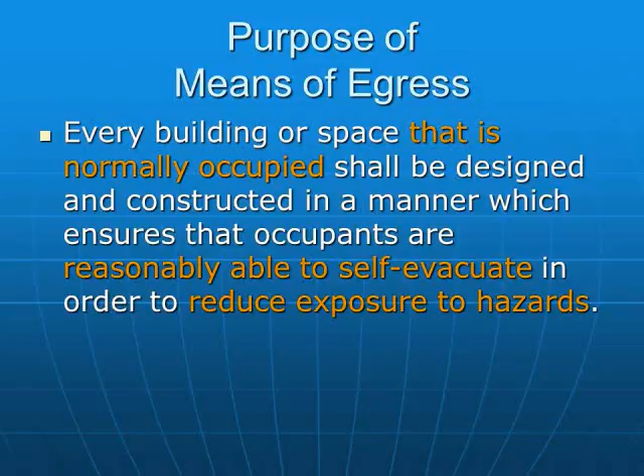Also note that the objective is not to make a building absolutely perfect and risk-free. The means of egress system provides occupants the opportunity to be reasonably able to self-evacuate in a manner that will reduce their exposure to a developing hazard within the building.

The means of egress for a building is composed of a system that consists of three components. Those components are the exit access, exit, and exit discharge. While these egress components may often seem very similar, each component serves a different purpose and protects occupants in a different manner.

Understanding the distinct purpose of each component is critical to ensuring a safe building because occupants may need a different mode of protection depending on where they are. Protection of a person located in a large open room may utilize different design strategies than a person located inside a fire resistance rated stair shaft or located outside of a building on an exterior exit balcony.

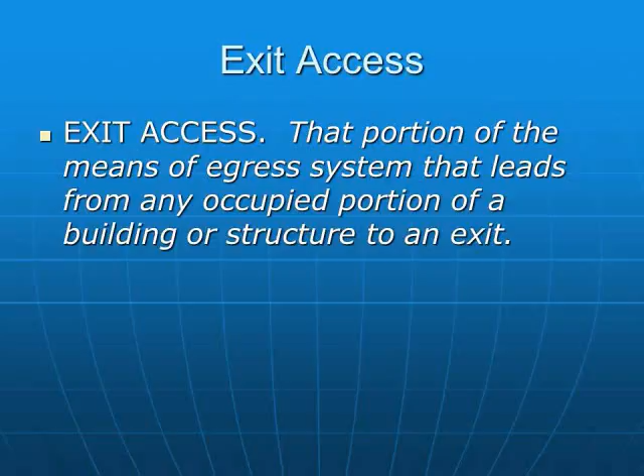So let's take a quick look at the purpose of these three components, starting with exit access. Exit access is defined as that portion of the means of egress system that leads from any occupied portion of a building or structure to an exit.

Next, the exit is that portion of a means of egress system between the exit access and the exit discharge or the public way. Exit components include exterior exit doors at the level of exit discharge, interior exit stairways, interior exit ramps, exit passageways, exterior exit stairways, and exterior exit ramps and horizontal exits.

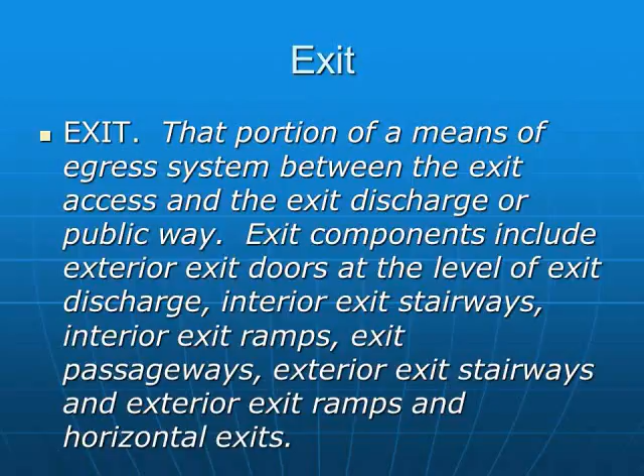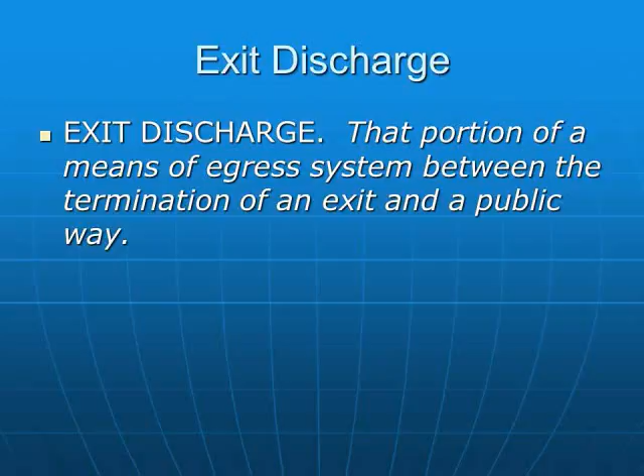Finally, exit discharge is defined as that portion of a means of egress system between the termination of an exit and a public way.

Graphically, we can see how the three components work together by considering the man on the fourth floor of this building. Features designed and constructed into the building will lead him to an exit. Those features comprise the exit access.

Once the woman enters the interior exit stairway enclosure, the exit component will provide her with a safe, protected, and continuous path extending from the exit access all the way to the exit discharge or the public way.

Finally, the woman at the bottom has reached the termination of the interior exit stair and advances further away from the building until she reaches the public way. This final portion is the exit discharge.

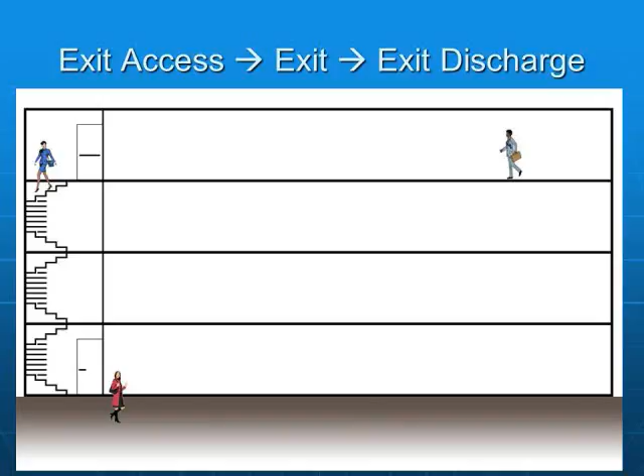So now that we've seen how the three-part means of egress system works, let's take a look at some common elements of an egress system. Each of the three components may be comprised of one or more individual elements. Typical elements of an egress system include such things as doors, exit access ramps, interior exit stairs, exterior exit balconies, exit courts, corridors, exit passageways, horizontal exits, areas of refuge, and many more.

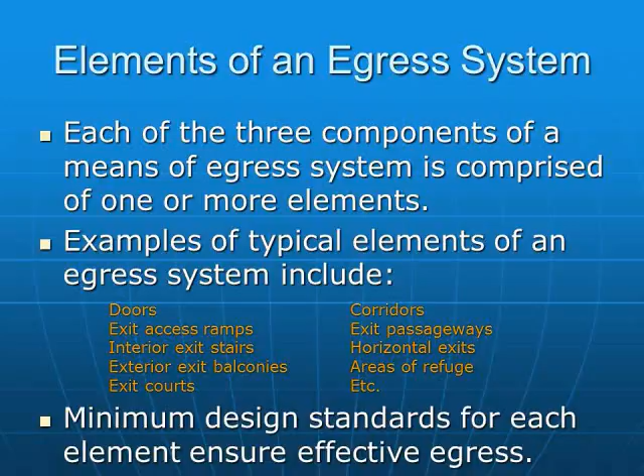The minimum design standards for each element within the egress system are different, and collectively they work together to ensure an effective egress system. So it sounds simple enough, right? Well, consider this. Do all egress systems include each of the three components? Do all egress systems include an exit access, an exit, and an exit discharge?

When designing a building or performing a plan check prior to permit issuance, or when conducting a building inspection during construction, how do you know which part of a means of egress system you're in? Who decides which part of the means of egress system you're in? How do you determine what level of protection is required?

These are all important considerations because a designer should not be expected to integrate exit features into a portion of a building that serves only as an exit access component. Similarly, once building occupants reach the exit discharge, most protection features associated with the exit components are no longer mandatory. As long as code limitations for each individual component are not exceeded, the designer is entitled to determine which egress component is used within the building. Let's take a look at how egress systems work.

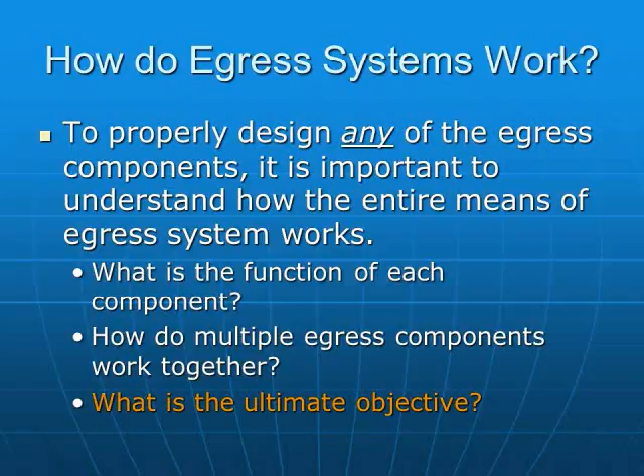To properly design any of the egress components, it's important to understand how the entire means of egress system works together. Ask yourself, what is the function of each component? How do multiple egress components work together? Remember, we're considering not just an exit, but an entire means of egress system. Consider, what is the ultimate objective? Well, at its most basic, the ultimate objective of every egress system is to safely facilitate the effective and orderly self-evacuation of all building occupants under conditions which are reasonably likely to occur at some point during the building's anticipated life cycle.

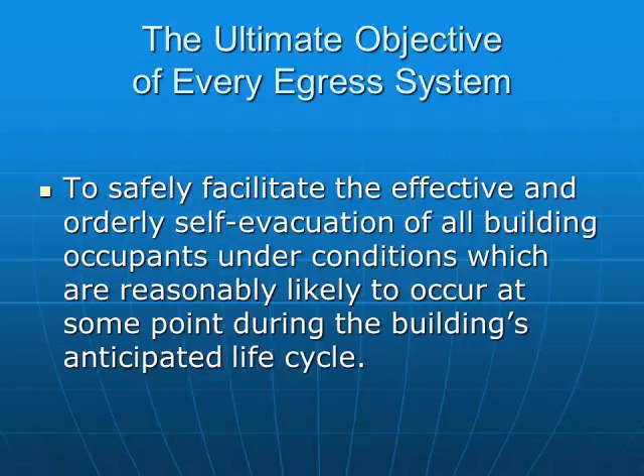So before we get into some of the technical aspects of means of egress, let's take one final look at how multiple egress components work together. First, before a building's means of egress even comes into play, occupants are informed that there is a need to evacuate the building. This may result from the actuation of a building's alarm system, or due to shared information among other building occupants, or the individual may observe a developing hazard with their own eyes. Here's where the means of egress system starts to function.

First, it enables occupants to find an exit in a safe, effective, and orderly manner. Second, it protects the occupants if they will remain inside the building for an extended period of time while they progress toward safety. Third, once out of the building, it facilitates dispersal of all occupants away from the building so they do not hinder the ability of others behind them from also leaving the building. The exit access is the portion which enables occupants to quickly and effectively find an exit. The exit protects the occupants if they will remain inside the building for an excessive period of time before they get out. The exit discharge facilitates dispersal of occupants away from the building to avoid congestion.

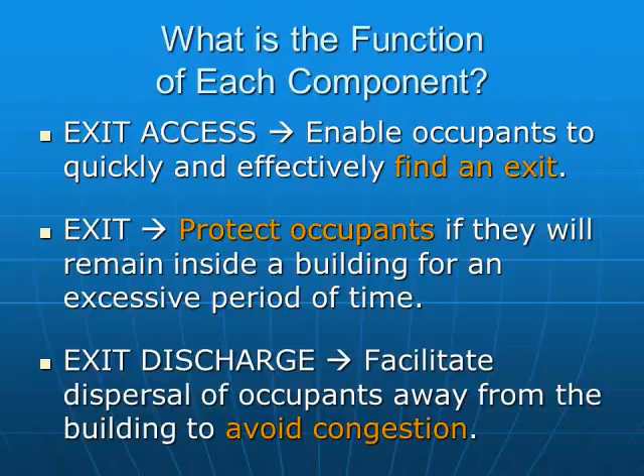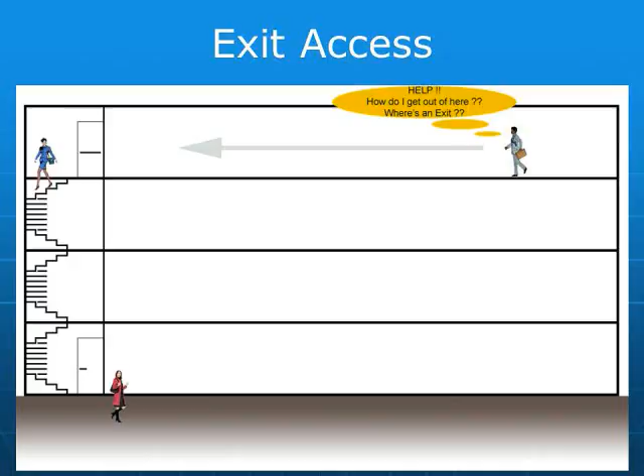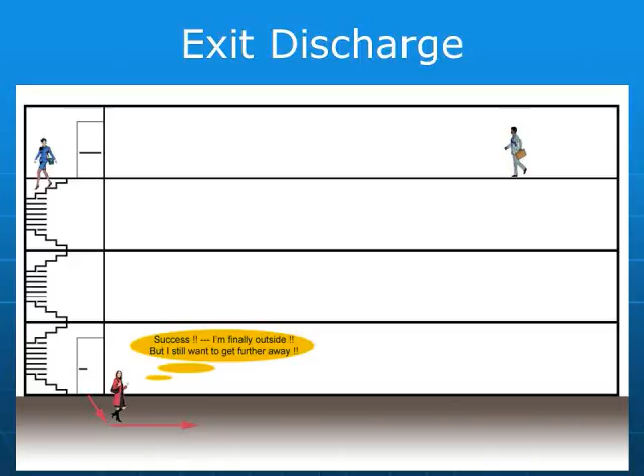So as we can see, occupants commence their evacuation within the exit access as they maneuver themselves through occupied building spaces in search of an exit. Once they find an exit, a significant level of protection is provided because it may take them a while before they reach the end of the exit and emerge from the building. Once outside of the building, exit discharge features provide further safety by facilitating dispersal of people toward a safe location, such as a public way.

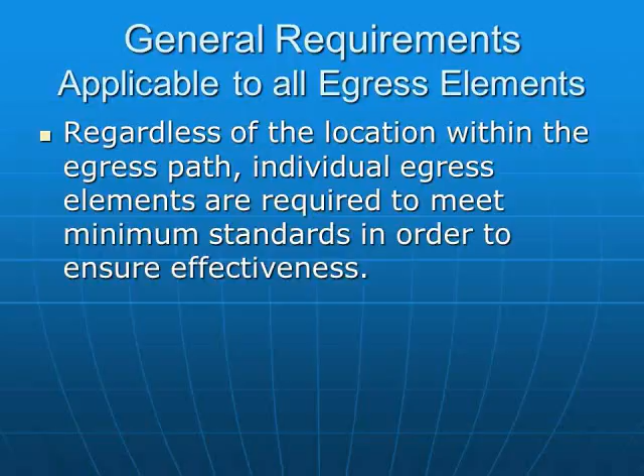So now let's take a look at some general requirements that apply to all egress elements. The entire means of egress system is only as strong as its weakest link. Regardless of the location within the egress path, individual elements are all required to meet minimum standards, and in this way, they fit together to ensure an effective system. These minimum standards address issues such as clear space necessary to provide sufficient height and width along the egress path, obstructions and protrusions which may extend into the egress path, doors and door operations along the entire length of the egress path,

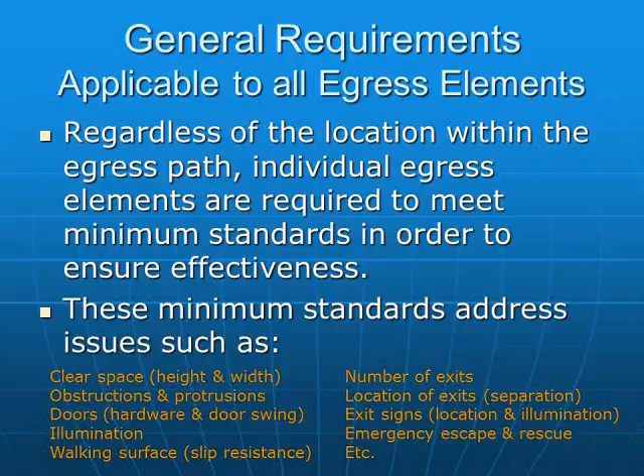illumination to ensure that occupants can see where they need to go, walking surface characteristics to ensure that people don't slip, trip, or fall while trying to find their way to safety, number and location of exits to ensure a safe and effective distribution that will accommodate all of the occupants within a building or space, exit signs to effectively direct occupants to safety rather than require them to search during an emergency situation, emergency escape and rescue openings from sleeping rooms to ensure that people aren't trapped if a hazard develops while they are asleep.

Let's start with ceiling height and obstructions. To ensure that occupants can safely and rapidly progress through the means of egress system without unexpectedly hitting their heads or other parts of their bodies, the means of egress system shall have a minimum ceiling height of not less than 7 feet 6 inches.

There are a few exceptions which allow for some reasonable deviations. Portions of sloped ceilings and ceilings within residential occupancies are allowed to extend lower than 7 feet 6 inches in accordance with Section 1208.2. These are generally areas along the perimeter of rooms, which often accommodate furniture and are not likely to be part of the normal circulation path.

Projections such as ceiling light fixtures, architectural embellishments, and structural components are allowed to extend down to 6 feet 8 inches, provided such projections do not exceed 50% of the width of the space.

Within parking garages and mezzanines, the ceiling height may be reduced to 7 feet 0 inches. Finally, at stairs, ramps, and doorways, the minimum clear height may be reduced to 6 feet 8 inches, with further allowance that door closers and door stops may extend an additional 2 inches to 78 inches above the walking surface.

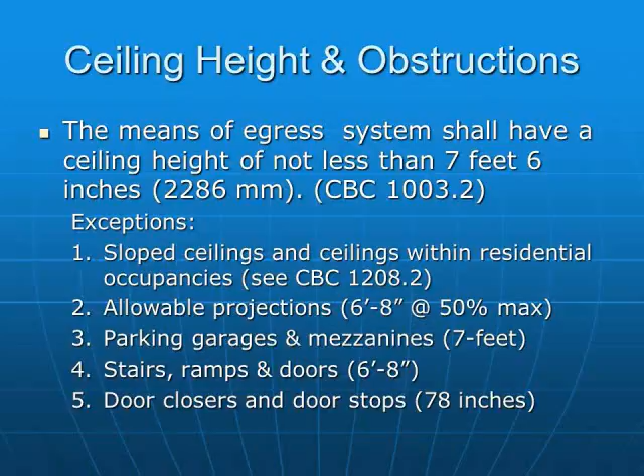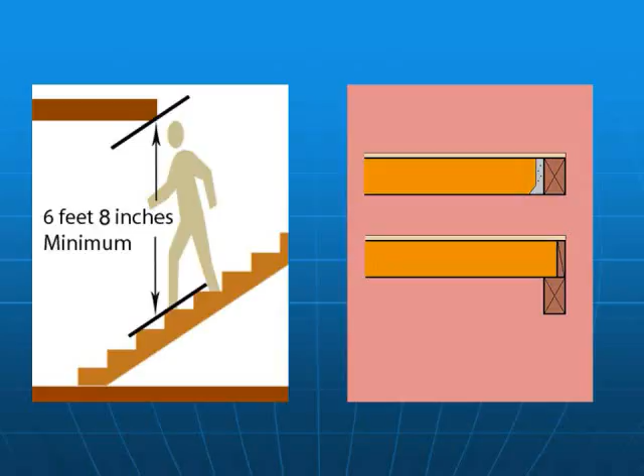As seen on the right, the distance between supporting floor joists by bearing directly on top of a beam versus framing the joist flush by using joist hangers can make a big difference.

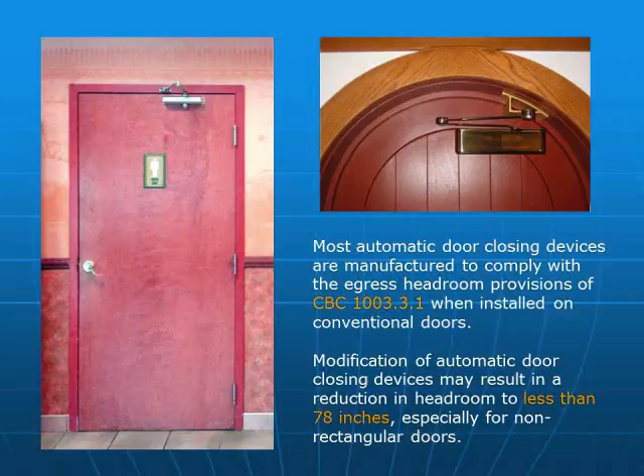While the underside of door stops and door closer devices are allowed to extend down to 78 inches, modifications to standard hardware as shown on the right may cause portions of the door closer to project even lower than 78 inches. The minimum clear width of most means of egress elements is determined on the basis of occupant load.

Additionally, since people naturally require more time to move vertically downstairs compared to the time necessary to move horizontally across a flat floor, the code establishes a slightly wider standard for stairways compared to all other egress components. Essentially, the larger the number of occupants that must fit through an egress component, the wider it must be to prevent a bottleneck.

For stairways, the minimum width in inches is determined by multiplying the occupant load served by a factor of 0.3. Hence, an upper floor of a building with an occupant load of 800 people would require a minimum width of 800 times 0.3 equals 240 inches of total egress stair width.

For stairways serving other than Group H and I2 occupancies, the minimum width factor is reduced to 0.2 inches per occupant when the building is equipped with both an automatic sprinkler system and an emergency voice alarm communication system.

For Group H1, H2, H3, and H4 occupancies, the minimum width factor for stairways is 0.7 inches per occupant, in recognition that the extra width may enable more effective egress from hazardous occupancies.

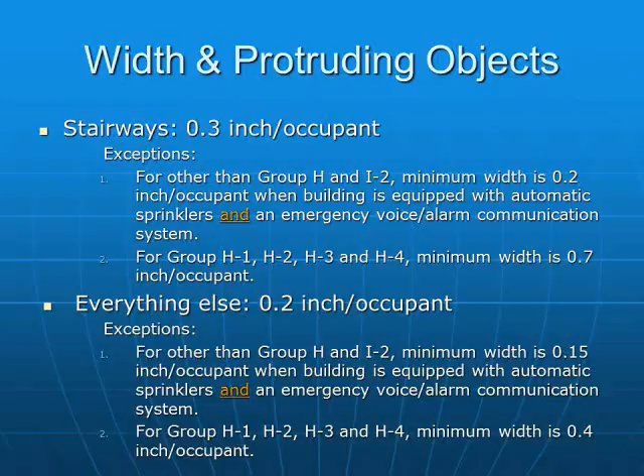For Group H1, H2, H3, and H4 occupancies, the minimum width factor is 0.4 inches per occupant, in recognition that the extra width may enable more effective egress from hazardous occupancies.

To reduce the likelihood that objects protruding from walls will interfere with effective circulation, horizontal projections are limited to a maximum of 4 inches when located between 27 inches above the walking surface to 80 inches above the walking surface.

The purpose of limiting horizontal projections is primarily to assist visually impaired individuals and to prevent obstructions from slowing movement within the circulation path of an emergency.

For consistency with accessibility standards, handrails are permitted to protrude 4.5 inches from a wall, and special provisions are also included in the code for Group I2 occupancies to allow for gurney movement and alcohol-based hand sanitizer dispensers.

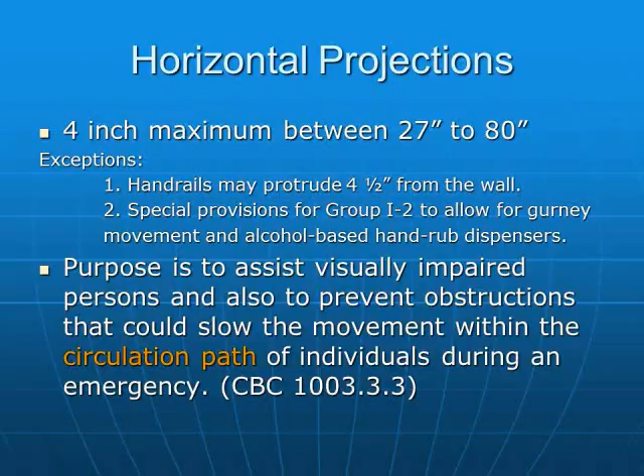Proper walking surfaces are another important aspect of egress systems. Unfortunately, the consequences when even a single person trips, slips, or falls, while others behind them are also attempting to flee from a hazard, can be severe. So, what's required?

Section 1003.4 establishes that walking surfaces of the means of egress shall have: 1. A slip-resistant surface, and 2. Be securely attached. But even with a properly secured, slip-resistant finish, people can still stumble if elevation changes are not properly addressed. To avoid problems, elevation changes less than 12 inches in height must be sloped, and slopes greater than 20 to 1 shall be by a ramp.

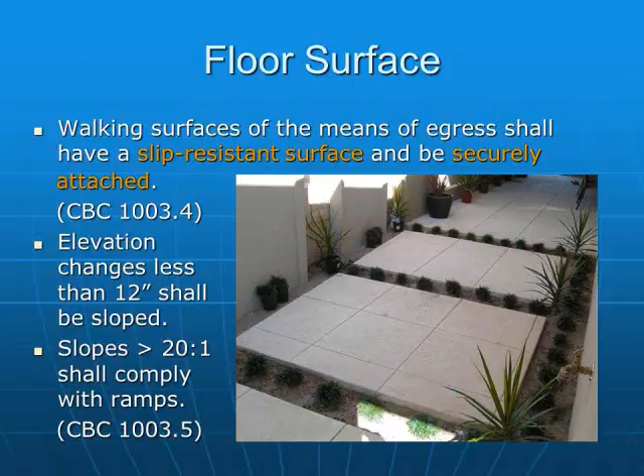Speaking of marginally illuminated environments, how much illumination is required? It turns out that the human eye can discern quite a bit of detail with just a little light. Accordingly, normal illumination within the egress path is sufficient as long as the intensity is not less than 1 foot candle, measured at all points along the walking surface at all times in which the space served is occupied.

Under normal conditions, illumination power shall be provided by the premises electrical power system, which ensures constant illumination at a consistent intensity. But in the event of a power failure, certain areas within the means of egress are required to have an emergency power supply which will provide all of the following.

Emergency generators or batteries shall last at least 90 minutes. Emergency lighting shall supply an average intensity of at least 1 foot candle throughout the means of egress, with a minimum of 0.1 foot candle intensity at all points along the walking surface.

At the end of 90-minute duration, emergency power shall still be sufficient to provide an average intensity of 0.6 foot candle with a minimum of 0.06 foot candles at all points. The maximum to minimum illumination ratio of 40 to 1 remains in the code, which is intended to prevent emergency lighting fixtures from being installed in a manner that results in areas that are exceedingly bright or dim.

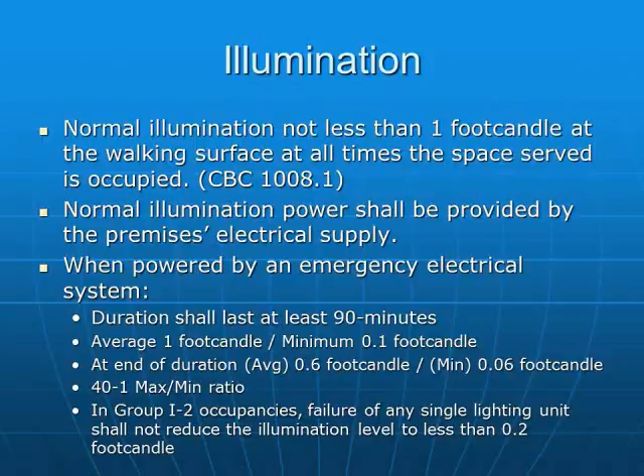The reason that emergency lighting is subject to a maximum-minimum intensity ratio is that most emergency lighting is accomplished through dedicated lighting fixtures instead of general lighting equipment.

High-intensity emergency lighting is very popular because it can broadcast light over a very broad area while using fewer devices. Unfortunately, if they are spaced too far apart, the walking surface immediately below the units can be extremely bright, while the intensity drops off further away. Just as our eyes need to adjust when you walk into a dim movie theater, vision can be impaired if the egress path passes through very bright spots to dim locations.

Often, the only way to evaluate this during a building inspection is to cut building power and measure the lighting intensity during nighttime hours.

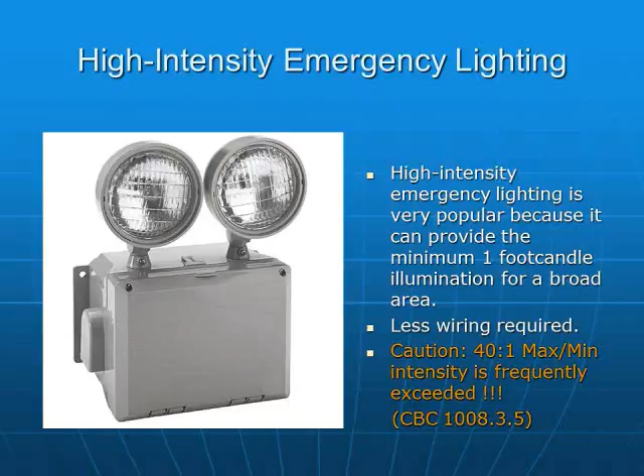So where does the egress illumination require emergency power? Emergency illumination power is required in rooms and spaces that require 2 or more means of egress, at aisles, corridors, and exit stairways and ramps.

It's also required in buildings that require 2 or more means of egress at interior and exterior stairs, ramps, and exit passageways, vestibules, and areas on the level of exit discharge used for exit discharge, and at all exterior landings for exit doors that lead directly to the exit discharge.

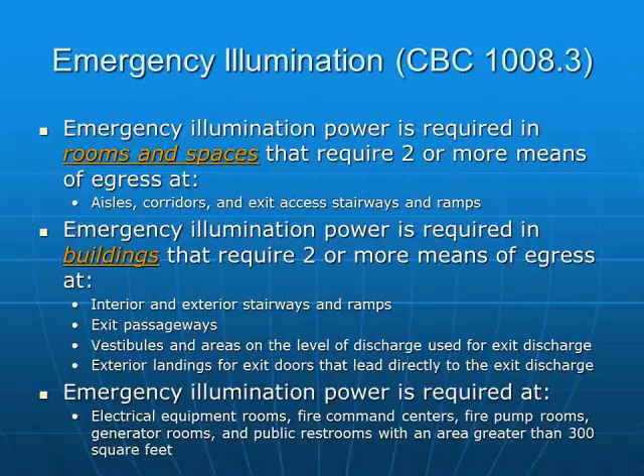And because access may be necessary during emergencies, emergency illumination power is required at electrical equipment rooms, fire command centers, fire pump rooms, generator rooms, and public restrooms larger than 300 square feet.

Exit signs and markings are perhaps the best tools to help occupants find an exit. Generally, exit signs are required at all exit and exit access doors. The path of egress travel leading to exits, and even within the exits themselves, shall be marked by readily visible signs that clearly indicate the direction of egress travel whenever the exit path is not immediately obvious.

The spacing of exit signs shall not exceed a maximum of 100 feet or the listed viewing distance, whichever is less. Exit signs must be readily visible from any direction of egress travel, which sometimes necessitates the installation of multiple exit signs in one location.

Exit signs are not required in rooms or areas that require only one exit or exit access. When approved by the building official, main exterior exit doors or gates that are obviously and clearly identifiable as exits do not require exit signs either.

Individual dwelling or sleeping units in Group R1, R2, or R3 occupancies do not require exit signs, nor do Group U occupancies. Day rooms, sleeping rooms, or dormitories in Group I3 occupancies do not require exit signs. And for practical reasons, the seating side of vomitories or openings into seating areas in Group A4 and A5 occupancies do not require exit signs if signage located in the concourse are readily apparent.

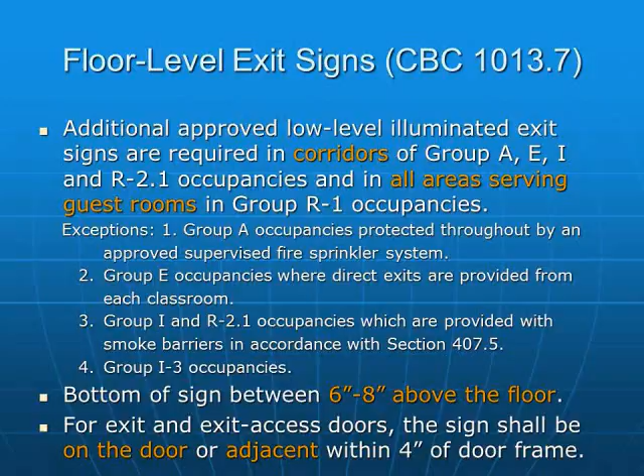There are 4 exceptions where low-level exit signs are not required: Group A occupancies protected throughout by an approved, supervised fire sprinkler system; Group E occupancies where direct exits are provided from each classroom; Group I and R2.1 occupancies which are provided with smoke barriers to create multiple smoke compartments in accordance with Section 407.5; and Group I3 occupancies are exempt from the requirement for low-level exit signs.

Path markings provide even further guidance during emergencies, and additional approved path marking shall be installed at floor level or no higher than 8 inches above the floor level in all interior rated exit corridors of unsprinklered Group A, R1, and R2 occupancies. Such marking shall be continuous except as interrupted by doorways, corridors, or other such architectural features in order to provide a visible delineation along the path of travel.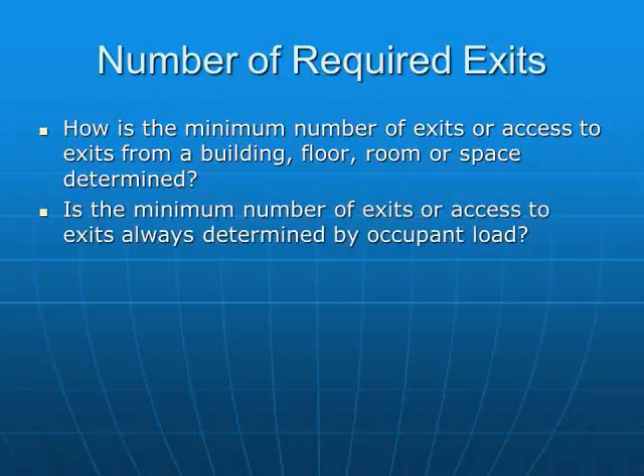So now we've discussed minimum requirements for most of the basic elements within a means of egress system. But how is the minimum number of exits or access to exits from a building, floor, room, or space determined? Is the minimum number of exits or access to exits always determined by occupant load? What other factors contribute to the minimum number of exits or access to exits? When multiple exits or access to exits are required, how must they be arranged? And how many exits or access to exits are required from an occupied roof?

Some of the egress provisions in the 2016 CBC have been combined, and Table 1006.2.1 now indicates that at least 2 exits or exit access doors are required from any space where the design, occupant load, or the common path of egress travel exceeds certain limits.

Section 1006.2.1 has 3 exceptions where only 1 exit or exit access door would be required: individual Group R2 and Group R3 dwelling units, when equipped throughout with an automatic sprinkler system and the common path of egress travel is limited to 125 feet or less; care suites in Group I2 occupancies that comply with stringent additional egress provisions found in Section 407.4; and for detention and correctional facilities and holding cells, such as are found in courthouse buildings, when the occupant load is more than 20, refer to Section 408.3.11 for details.

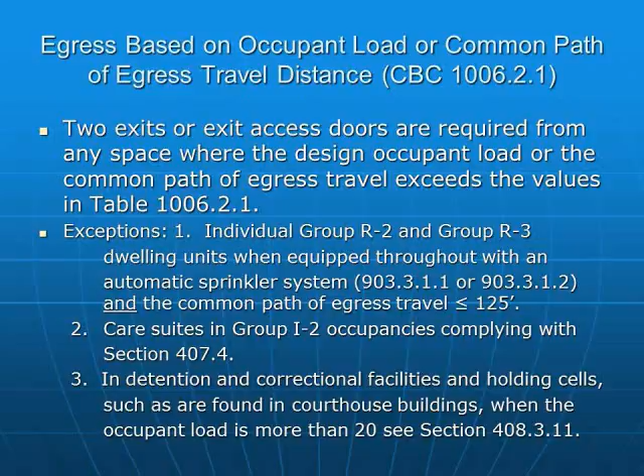So this is the new Table 1006.2.1 in the 2016 California Building Code. Notwithstanding further footnoted limitations, only 1 exit or exit access doorway is required from spaces as long as the maximum occupant loads are not exceeded and the maximum common path of egress travel is not exceeded, for both sprinklered and non-sprinklered spaces. Otherwise, if table values are exceeded, spaces must be provided with at least 2 exits or exit access doorways.

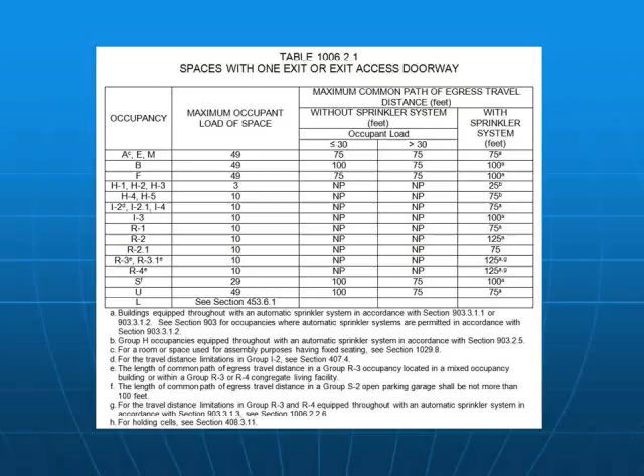Table 1006.3.1 establishes the basic minimum number of exits or access to exits per story or occupied roof, based on the occupant load of that particular story or roof. Note that Section 1006.3.2 must also be consulted, because under certain conditions, Tables 1006.3.2 number 1 and 1006.3.2 number 2 can reduce the required number of exits or access to exits for buildings and stories allowed to have only a single exit.

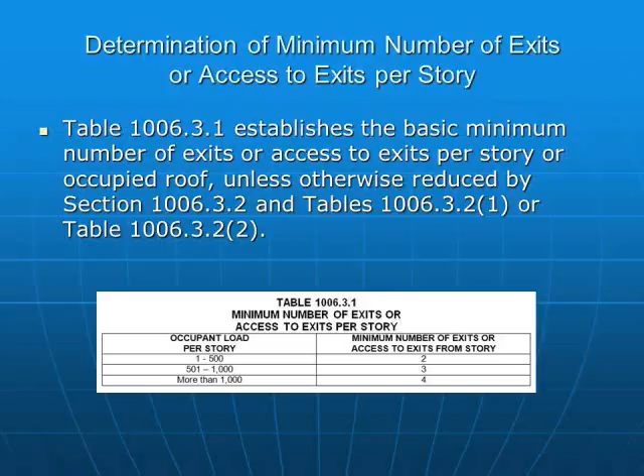Here are Tables 1006.3.2 number 1 and 1006.3.2 number 2. The upper table applies only to Group R occupancies consisting of dwelling units. The lower table applies to Group R occupancies consisting of sleeping units as well as all non-residential occupancies.

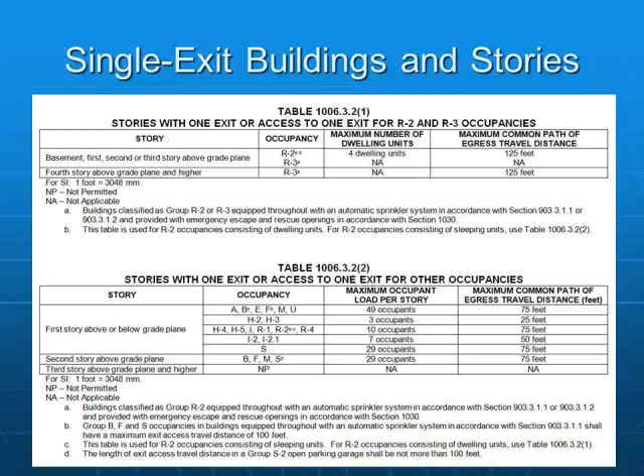For both tables, as long as the number of dwelling units or occupant load per story is small and the common path of egress travel does not exceed the maximum limits, the building or story under consideration requires only a single exit.

Of course, in most cases, especially on upper floors or in large buildings, multiple exits or exit access doorways are required. Section 1007.1.1 governs arrangement of multiple exits to ensure that they are situated in a manner that facilitates effective egress and ensures that if one means of egress is blocked or compromised, others remain intact.

When 2 means of egress are required from a space, they must be separated by a distance that is equal or greater than 1/2 the length of the maximum overall diagonal dimension of the area served. The separation distance is measured in a straight line, except that where interior exit stairways or ramps are connected by a 1-hour corridor, the separation distance shall be measured along the corridor.

If the entire building is protected by an automatic sprinkler system, the separation distance may be reduced to 1/3 the maximum diagonal dimension. When access to 3 or more exits is required, at least 2 of the exits shall be separated by the appropriate diagonal dimension, and all additional exits shall be reasonably distributed for effectiveness.

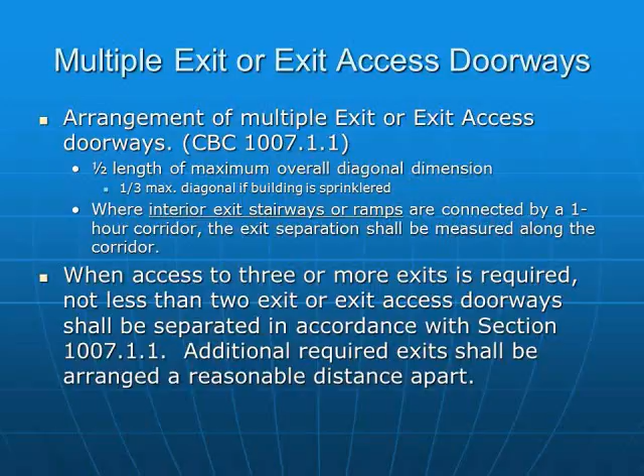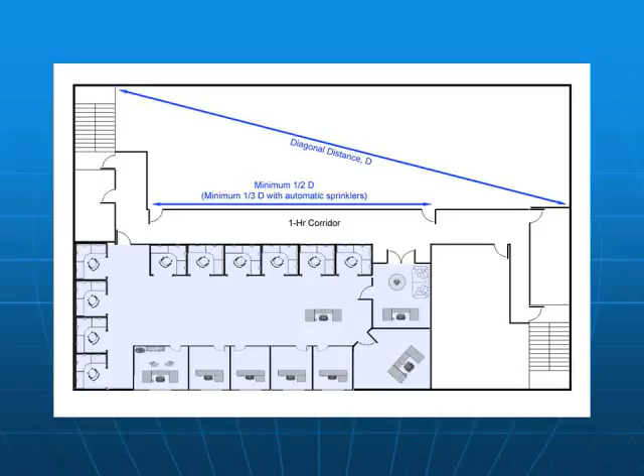In this example, an empty tenant space has two exit access doors, which are separated by 1/2 the length of the maximum diagonal dimension of the space. If the building is equipped with an automatic sprinkler system, the door spacing could be reduced to 1/3 the diagonal dimension. In this example, the office space has two exit access doors which are clearly separated by at least 1/2 the diagonal dimension of the space.

If one of the exit access doors were blocked during an emergency, the other is sufficiently distant that it would most likely remain in service.

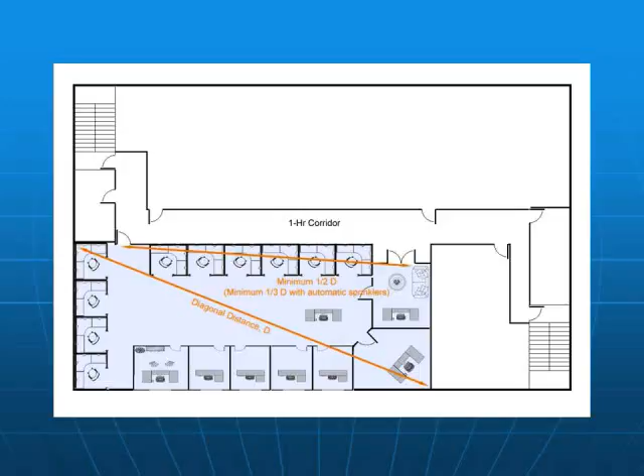When considering the entire floor, the interior exit stairways are connected by a 1-hour corridor, so the separation may be measured along the corridor path.

And the last topic of discussion today is emergency escape and rescue openings. The CBC has a very subtle but significant amendment related to Section 1030.1. References to the single exit provisions of Tables 1006.3.2 number 1 and 1006.3.2 number 2 have been removed from the Model Code, and an additional exception has been added.

The net effect is that in addition to the normal means of egress required by Chapter 10, emergency escape and rescue openings are required in Group R occupancies from basements and sleeping rooms below the 4th story. The emergency escape and rescue openings shall open directly into a public way or to a yard or court that opens to a public way.

The added exception indicates that the emergency escape and rescue openings are not required for Group R1 and R2 occupancies constructed of Type 1, 2A, 3A, or 4 construction, equipped throughout with an automatic sprinkler system in accordance with Section 903.3.1.1. Note that this exception does not apply if the sprinkler system only complies with Section 903.3.1.2.

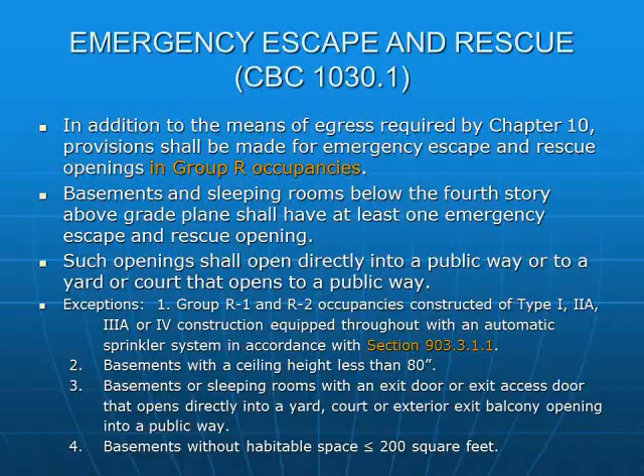The minimum clear width of emergency escape and rescue openings is 20 inches. The minimum clear height is 24 inches. And the bottom of the clear opening shall be located within 44 inches of the finished floor surface. Regardless of the opening's height and width, the net clear opening shall be at least 5.7 square feet, except for emergency escape and rescue openings on the grade floor level, which require a minimum of only 5.0 square feet.

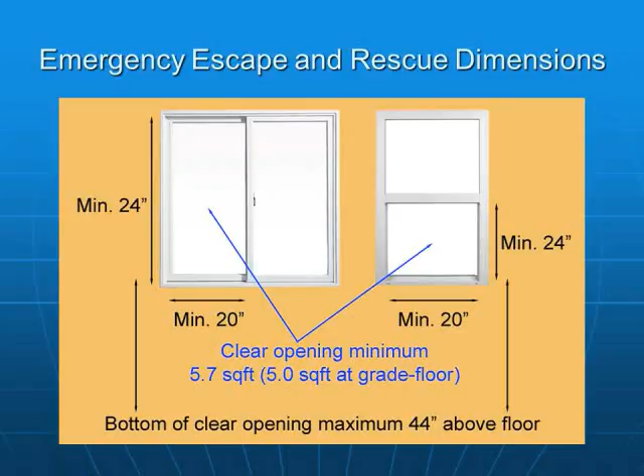Note that openings which barely meet both the 20-inch minimum width and 24-inch minimum height provide a net clear opening that is too small to satisfy the 5.7 or 5.0 square foot parameter.

And with that, we conclude the 2016 CBC Means of Egress Part 1 presentation. Thank you for joining us today. If you would like more information related to means of egress, you are invited to view Part 2, Part 3, and Part 4 of this series.